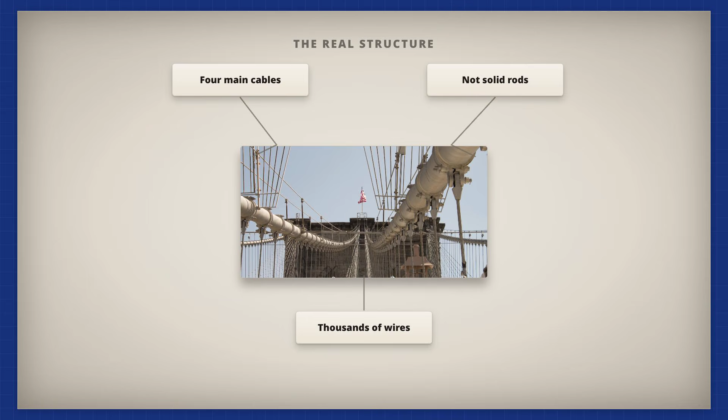Read that number again. The Brooklyn Bridge does not have 4 cables of equal weight that look like solid steel rods. The Brooklyn Bridge has 4 main cables, each one approximately 15.75 inches in diameter, each one composed of 5,434 individual parallel galvanized steel wires bundled into 19 strands, then wrapped into the final main cable.

Multiply 5,434 wires by 4 main cables by the bridge's main span of 1,595 feet, plus the side spans and the anchorage runs, and you arrive at approximately 14,000 miles of total wire length.

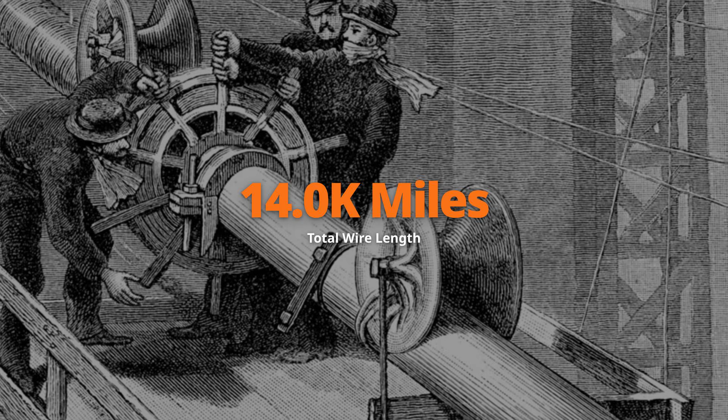Every single inch of that wire was spun in place over the East River in 1877 and 1878, using traveler wheels on overhead rails to carry each individual wire across the gap continuously, one strand at a time, day after day, for 26 months of continuous spinning operations.

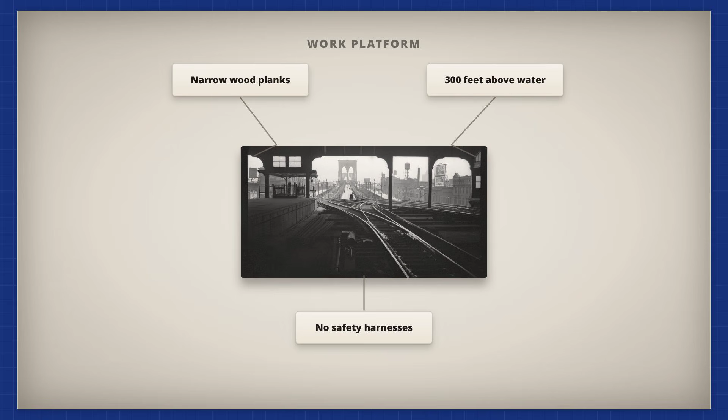The Brooklyn Bridge cable spinning operation is one of the most extraordinary engineering achievements of the 19th century. It is also one of the most physically dangerous. Workers stood on narrow wooden platforms suspended approximately 300 feet above the East River. They had no safety harnesses. They had no hard hats. They had no electric lighting.

They had heavy galvanized steel wire running through their hands at speeds determined by the traveler wheels on the overhead rail system. They worked in all weather conditions short of major storms, including high winds that swung the suspended platforms substantially. 3 workers died during the cable spinning operation specifically, falling from the platforms into the East River below.

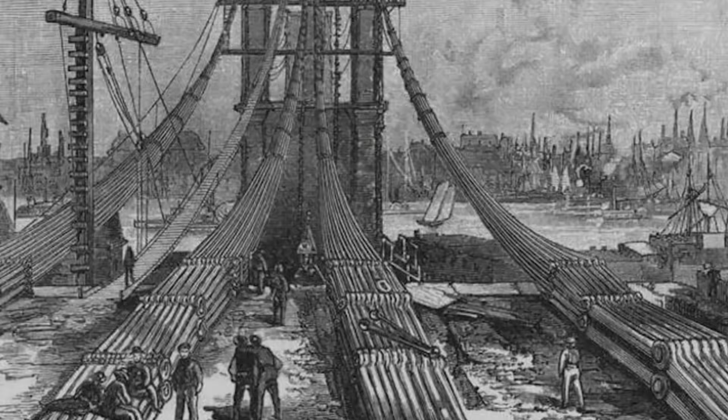24 other workers died during other phases of the bridge construction over the 14-year build period from 1869 to 1883. The total Brooklyn Bridge death count of 27 represents one of the lowest casualty rates among major American bridge projects of the late 19th century, but it was paid for in human lives nonetheless.

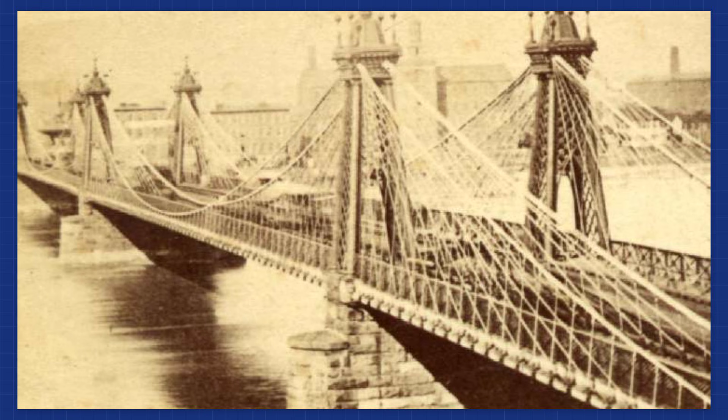The Roebling family designed and built the bridge. John Augustus Roebling was born in Germany in 1806, trained as a civil engineer in Berlin, emigrated to the United States in 1831, and built his career on iron wire rope manufacture and suspension bridge engineering. By the 1860s, Roebling was the most respected suspension bridge engineer in the United States.

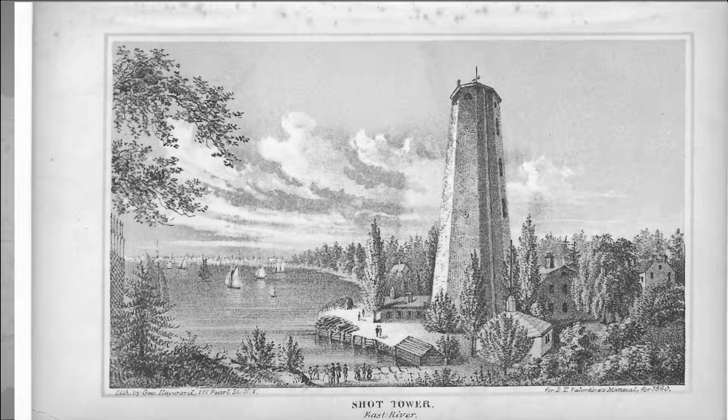He had designed and built the Allegheny Suspension Bridge in Pittsburgh, the Niagara Falls Suspension Bridge between New York and Ontario, and the Cincinnati Suspension Bridge across the Ohio River. In 1865, the New York State Legislature authorized a private corporation to build a suspension bridge across the East River between New York City and Brooklyn.

Roebling submitted the design proposal in 1867. Construction was authorized to begin in 1869. John Roebling personally surveyed the bridge site at the Brooklyn shoreline on June 28, 1869. He was standing on a dock supervising the alignment when a Fulton ferry boat collided with the dock and crushed his foot. The injury became gangrenous.

Tetanus set in. John Augustus Roebling died on July 22, 1869, 24 days after the survey accident, at the age of 63.

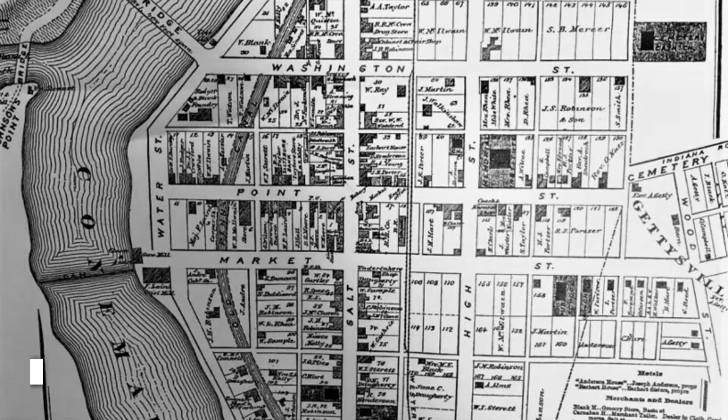Roebling had emigrated from Mühlhausen, Prussia to the United States in 1831 at the age of 25, originally settling in western Pennsylvania to establish a German immigrant agricultural community. The agricultural settlement struggled commercially, and Roebling turned to civil engineering work for various Pennsylvania canal and railroad projects through the 1830s.

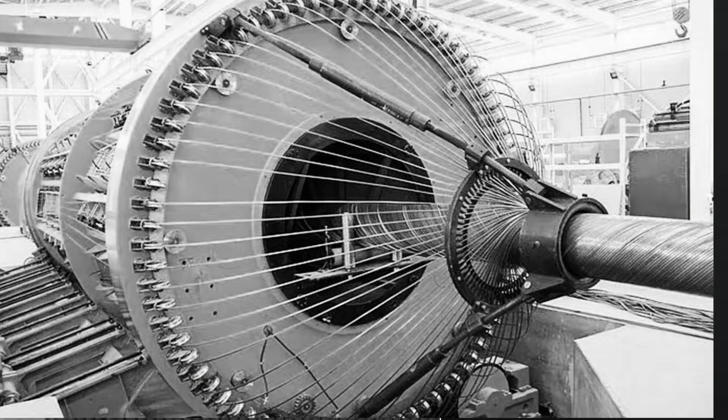By 1840, he had developed the first American iron wire rope manufacturing process, initially produced at a small wire works in Saxonburg, Pennsylvania, and later expanded to the larger Trenton, New Jersey facility. The iron wire rope was used for canal portage railroad cables, mine hoisting cables, and various other industrial applications. The wire rope manufacturing experience gave Roebling deep technical knowledge of high-strength tension cable behavior.

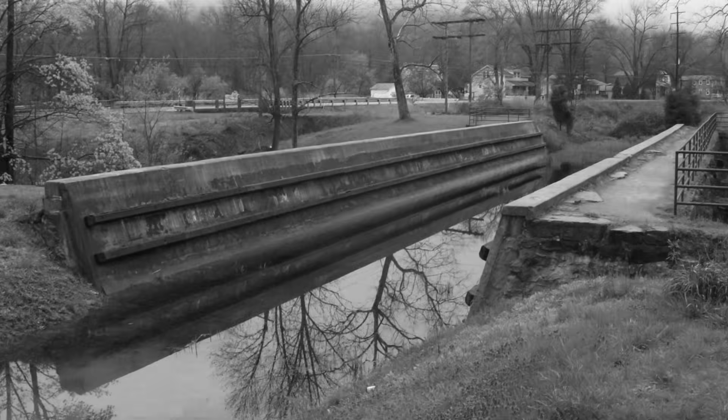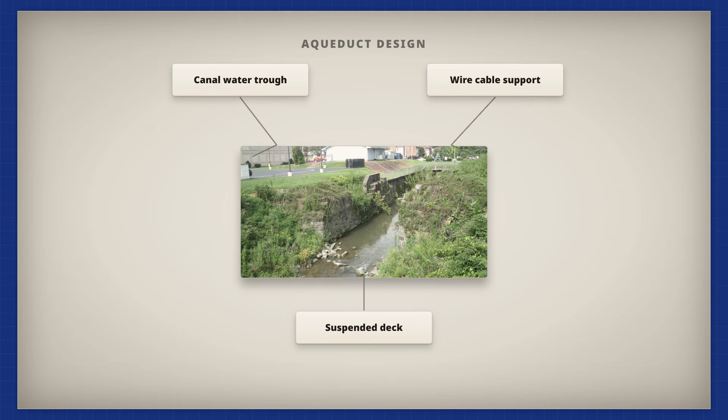which became the foundation for his subsequent suspension bridge work. Roebling's first major suspension bridge was the Allegheny Aqueduct, completed in 1845 across the Allegheny River in Pittsburgh. The aqueduct carried the Pennsylvania Canal across the river on a wire cable suspension structure, with a wooden trough carrying the canal water along the suspended deck.

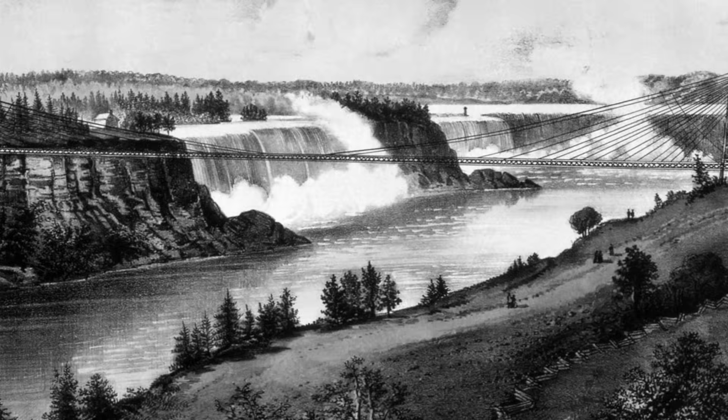The Allegheny Aqueduct was the first practical demonstration of wire cable suspension technology for major civil engineering work in the United States. The bridge operated successfully for 15 years before being replaced by a larger iron suspension bridge in the 1860s. The technical lineage from the Allegheny Aqueduct through Roebling's subsequent works to the Brooklyn Bridge is direct and continuous.

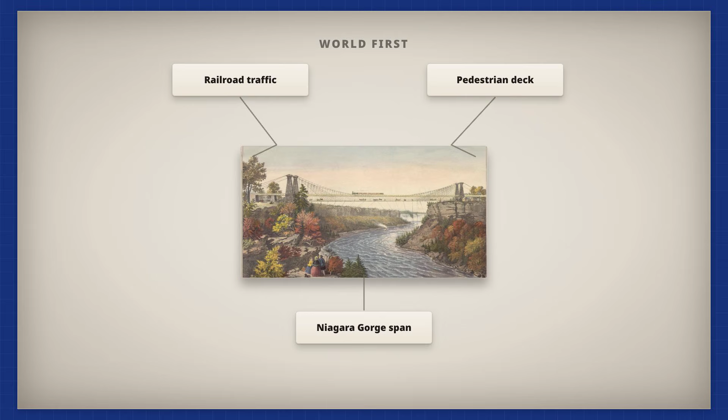Roebling's second major work was the Niagara Falls Suspension Bridge, completed in 1855. The Niagara Falls Bridge carried both railroad and pedestrian traffic across the Niagara Gorge between New York State and Ontario, Canada. The bridge was the first major railroad suspension bridge in the world, demonstrating that wire cable suspension could handle the heavy dynamic loads of railroad traffic. The Niagara Falls Bridge operated for 42 years before being replaced by a steel arch bridge in 1897.

Roebling's third major work was the Cincinnati Suspension Bridge, completed in 1866 across the Ohio River between Cincinnati, Ohio and Covington, Kentucky. The Cincinnati Bridge was the longest suspension bridge in the world at completion, with a main span of 1,057 feet. The bridge is still in active service today, having been continuously operated for 159 years.

Washington Augustus Roebling was 32 years old when his father died. He had served as a Union Army colonel during the Civil War, had spent 2 years studying European bridge construction in Berlin, Paris, and London during the 1860s, and had served as his father's chief assistant on the Cincinnati Suspension Bridge. He took over as chief engineer of the Brooklyn Bridge project within days of his father's death.

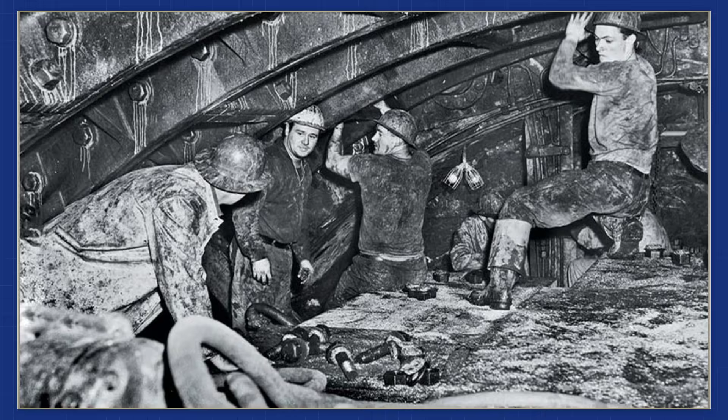The first major construction phase was the building of the 2 stone tower foundations in the East River bed. The tower foundations required pneumatic caissons. A pneumatic caisson is a large wooden box, open at the bottom, sealed at the top, that is lowered into the riverbed and filled with compressed air to keep water out. Workers descend into the caisson through an airlock shaft from the surface, then excavate the riverbed under the caisson to lower it deeper into the bedrock.

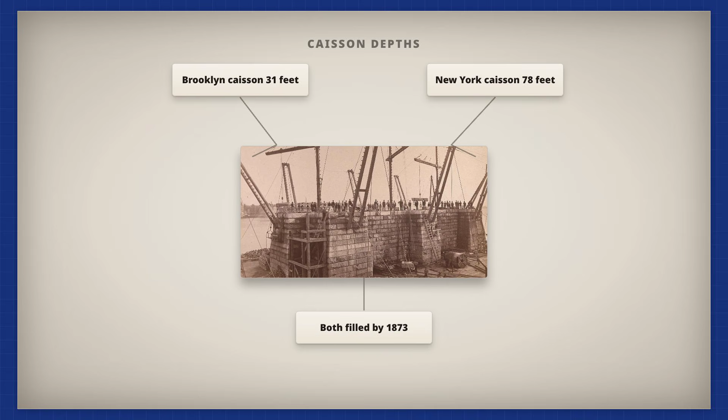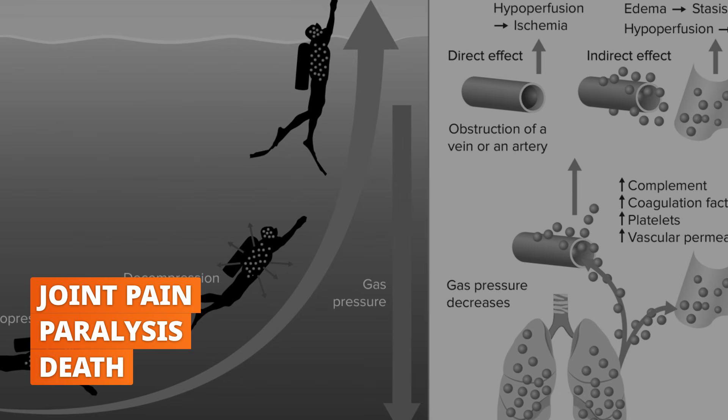The Brooklyn caisson was 31 feet below the East River water level. The New York caisson was 78 feet below. Both caissons had been sunk and filled with concrete by 1873. The problem with pneumatic caissons was a medical condition that 19th century engineers and physicians did not fully understand. When workers came back to the surface from a high-pressure caisson environment, they sometimes developed severe joint pain, paralysis, and in some cases death. The condition was called caisson disease at the time, or the bends because the joint pain made workers bend over in pain.

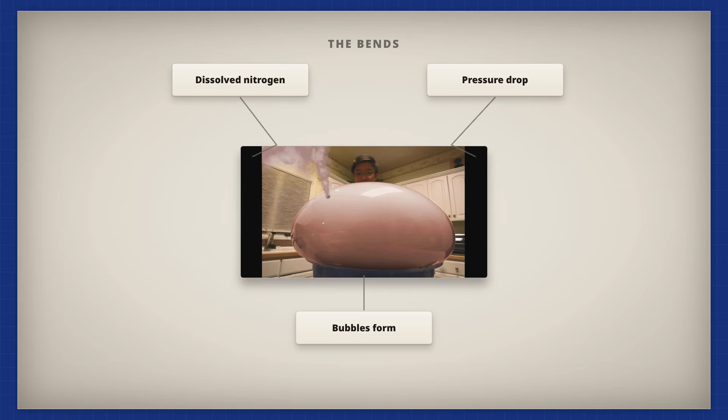Modern medicine calls it decompression sickness. It is caused by nitrogen gas dissolved in the bloodstream under high pressure forming bubbles in the blood and tissues as the pressure decreases during decompression. Nobody in 1872 understood the gas bubble mechanism. The treatment at the time was rest and warmth, neither of which actually helped. The only effective prevention was slow gradual decompression, which the Brooklyn Bridge crews started using on an ad hoc basis after some workers seemed to recover better than others.

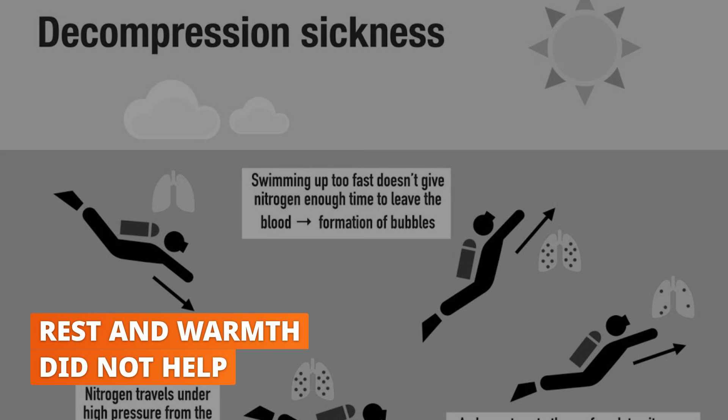Washington Roebling personally supervised the caisson work in 1872 and 1873, descending into the New York caisson at 78 feet of water depth multiple times per week to inspect the excavation progress. In late 1872, after one particularly long inspection in the New York caisson, Washington came up to the surface and collapsed. He had severe joint pain, partial paralysis, and what his wife later described as nervous prostration.

He never fully recovered. From 1873 onward, Washington Roebling was a partial invalid, confined mostly to his home in Brooklyn Heights, unable to walk to the bridge site, unable to climb on the construction platforms, unable to physically inspect the work. He was the chief engineer of the largest bridge construction project in American history, and he could not get out of his upper floor bedroom for the next 11 years.

Emily Warren Roebling was 29 years old when her husband Washington was disabled by caisson disease. She had been born into a prominent New York family in Cold Spring on the Hudson, had received an unusually thorough education for a woman of her generation, and had been corresponding with her husband on engineering matters since their marriage in 1865. When Washington was confined to bed, Emily became his deputy at the bridge construction site.

She visited the bridge daily for the next 11 years. She carried Washington's written instructions to the foreman. She studied Washington's engineering specifications. She gradually learned the technical content of the project so thoroughly that she could answer engineering questions from the foreman and the public on her own authority. By 1875, Emily Warren Roebling was effectively running the bridge construction project on behalf of her husband.

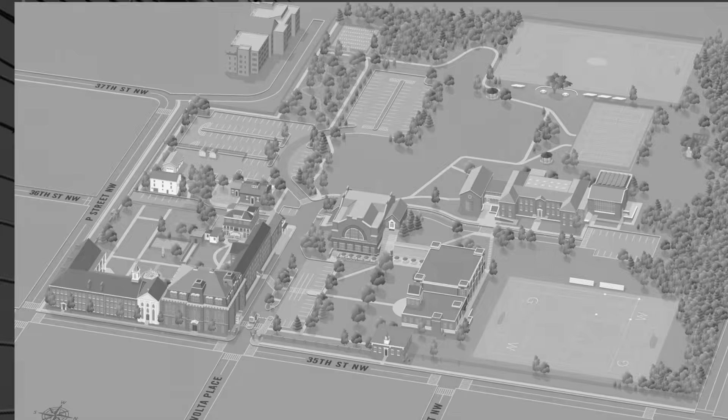Now we walk through the cable spinning operation specifically and why it is the technical heart of the Brooklyn Bridge story. Emily Warren Roebling's specific engineering education during her years as her husband's deputy deserves more detailed attention because it represents one of the most remarkable self-taught engineering education stories in American history. Emily had received an unusually thorough education for a woman of her generation at the Georgetown Visitation Convent School, where she had studied mathematics, French, and classical literature through age 18.

When her husband was disabled in 1873, Emily began systematic study of engineering with materials that Washington selected and explained to her from his bedroom. The curriculum included Henry Moseley's The Mechanical Principles of Engineering and Architecture, William Rankine's Manual of Civil Engineering, and various technical reference books on suspension bridge engineering, material science, and construction management. Emily studied these texts in the evenings while spending her days at the bridge construction site. Within 3 years, Emily had developed engineering knowledge sufficient to answer technical questions from foremen, contractors, and visiting engineers on her own authority without consulting Washington.

The engineering correspondence Emily maintained with the bridge contractors, the New York City municipal engineers, and the broader engineering community during her years as effective chief engineer is preserved at the Rensselaer Polytechnic Institute archives in Troy, New York. The letters show Emily addressing detailed technical questions including cable tension calculations, anchorage stress analysis, deck truss design questions, and labor management issues. The correspondence is signed by Emily directly, not as her husband's representative. Engineering visitors to the bridge construction site routinely addressed her as the responsible engineer on the project.

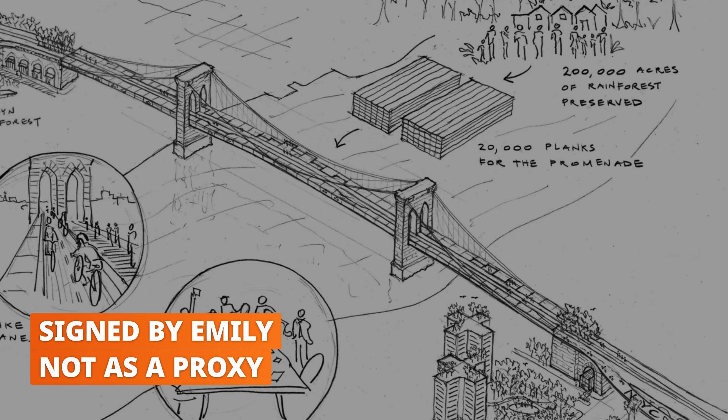The American Society of Civil Engineers, founded in 1852, did not admit women as members during Emily's lifetime. But Emily was invited to speak at the Society's annual meeting in 1882 specifically about her work on the Brooklyn Bridge. She declined the invitation, but the offer itself was unprecedented for a woman in 19th century American engineering.

The opening ceremony speech delivered by Abram Hewitt on May 24, 1883, included an extended public tribute to Emily Warren Roebling specifically. Hewitt was the New York congressman who had championed the Brooklyn Bridge project through Congress during the 1870s and who served as the official ceremonial speaker at the opening. Hewitt's speech included the lines, "The name of Mrs. Washington A. Roebling will be inseparably associated with all that is admirable in human nature and with all that is wonderful in the constructive world of art."

The tribute was published in newspapers across the United States the following day. It was the first time in American history that a major engineering achievement was publicly credited to a woman engineer at the opening ceremony of the project.

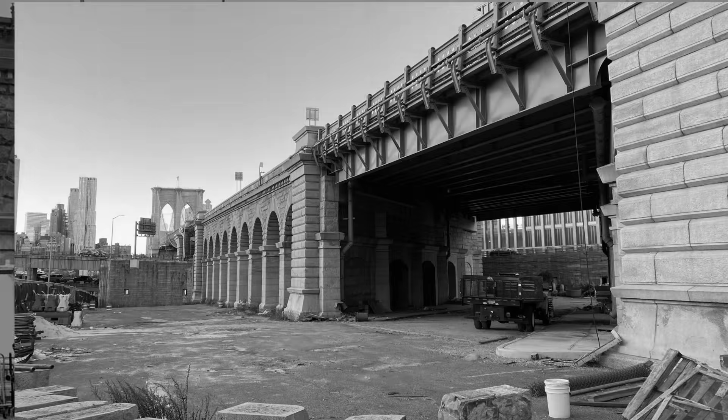The cable spinning operation began in earnest in May 1877. The 2 stone towers had been completed. The cable anchorages had been built on the Brooklyn and Manhattan shorelines. The anchorages were massive concrete and stone structures that held the ends of the cables firmly against the loading of the bridge deck. Each anchorage contained approximately 20,000 tons of stone and concrete fill, with iron eye-bars embedded in the masonry to attach to the cable strand ends.

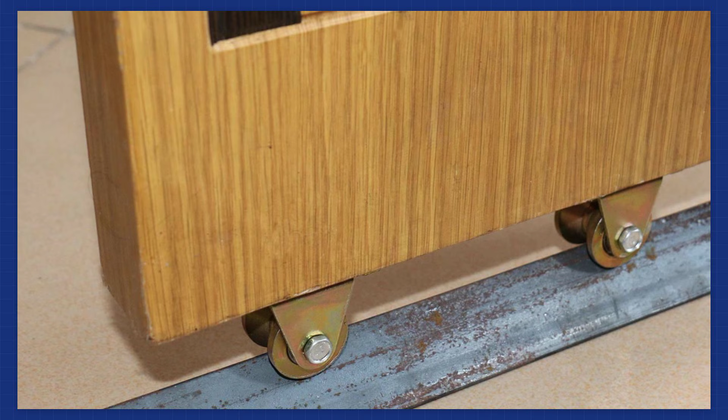The cables themselves had to be spun from individual galvanized steel wires across the East River and through the anchorages at both ends. The traveler wheel was the key piece of equipment for the spinning operation. A traveler wheel is a large wooden grooved wheel, approximately 8 feet in diameter, that rides on an overhead cable rail strung across the bridge from anchorage to anchorage over the tower tops.

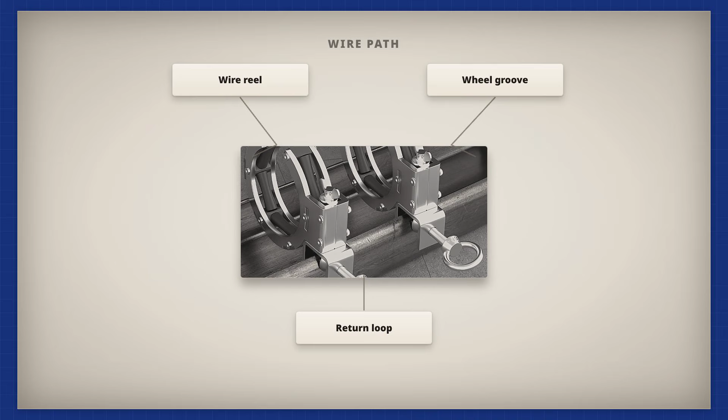The traveler wheel carries a single steel wire in its groove, with the wire fed continuously from a reel at one anchorage, around the traveler wheel, across the river, around a return wheel at the opposite anchorage, and back to the original anchorage. The traveler wheel is driven by a steam engine on the anchorage end, pulling the wire across the river at controlled speeds.

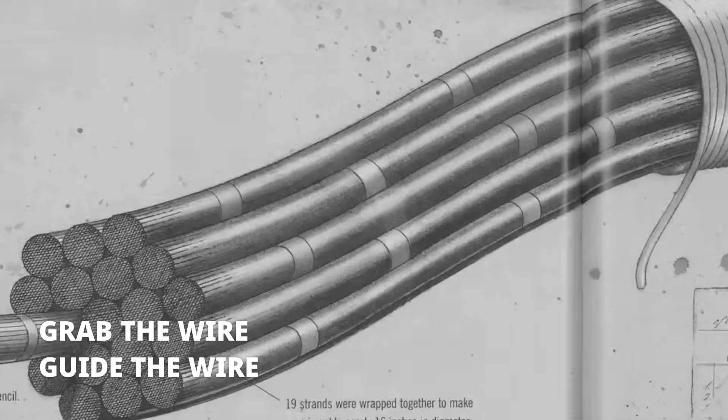Workers on the bridge platforms grab the wire as it passes and guide it into the proper position in the developing cable bundle. As each wire reaches its position, the wire is clamped temporarily in place, and the traveler wheel begins another circuit with the next wire. Repeat this process 5,434 times for each of the 4 main cables. 6 months of continuous operation.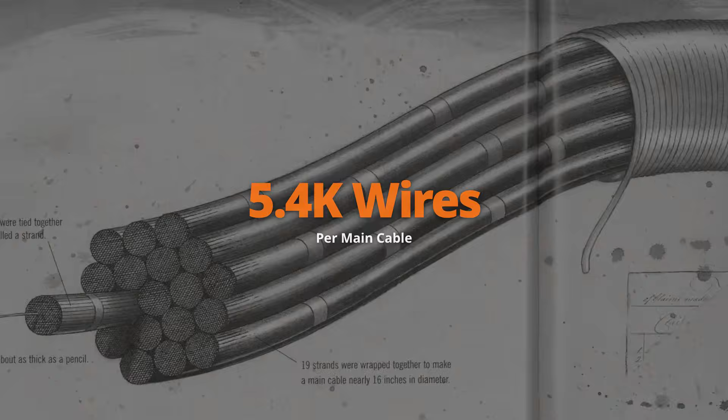Workers on the platforms handling wires, clamping them in position, bundling them into the developing strands, all while balanced on narrow wooden walkways 300 feet above the river.

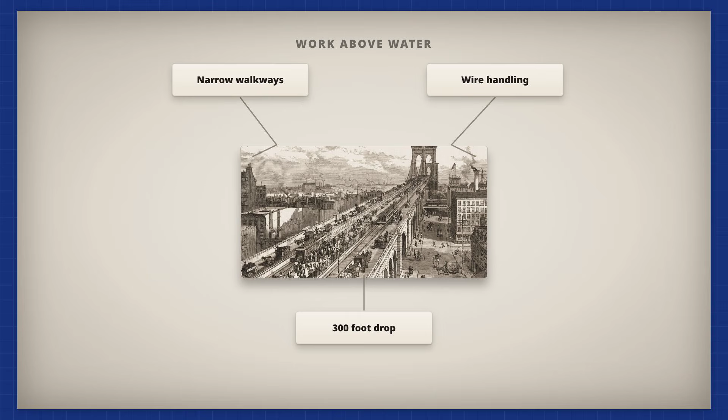The Roebling family wire works in Trenton, New Jersey, supplied the galvanized steel wire for the bridge cables. John Roebling had founded the wire works in 1848, originally to manufacture the iron wire rope he used for his early suspension bridges. By the 1870s, under the management of John's other son, Charles Roebling, the Trenton Works was producing high-strength galvanized steel wire to specifications that John Augustus Roebling had developed personally over the previous 20 years.

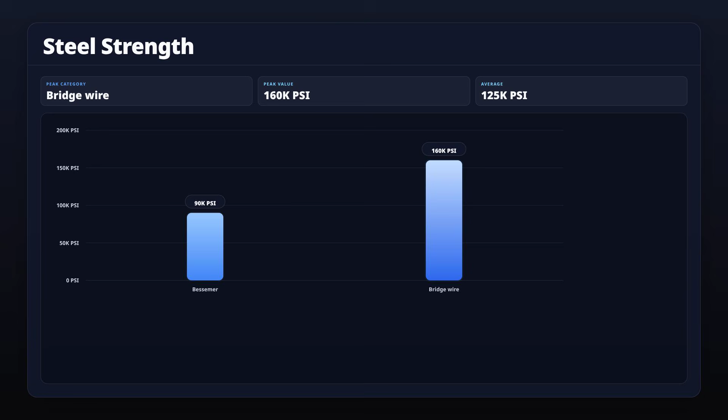The wire was approximately 1/8 of an inch in diameter, galvanized to resist corrosion, and tested to a tensile strength of 160,000 pounds per square inch. That tensile strength was approximately 3 times higher than the wrought iron strength used in earlier suspension bridges of the period. The Brooklyn Bridge cable specification could not have been built using wrought iron at the planned bridge span and load. The Roebling family had spent 20 years developing the steel wire technology specifically for this project.

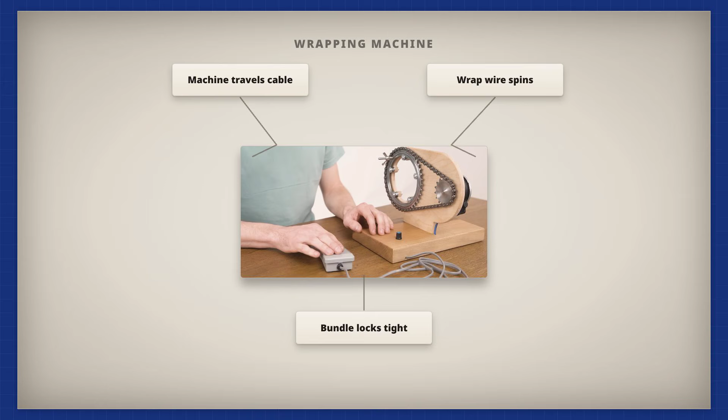The bundling process for the cables involved compressing the 19 strands of each cable into a tight cylindrical bundle, then wrapping the bundle with smaller diameter spiral wire that held the bundle together permanently. The wrapping wire was applied by a specialized machine called a cable wrapper, which traveled along the bundle as it ran across the bridge, spinning a continuous loop of wrapping wire tightly around the bundle. After wrapping, the cable was coated with red lead paint to protect against corrosion.

The total mass of each completed main cable was approximately 780 tons. The 4 main cables together added up to over 3,000 tons of suspended steel. The towers had to be designed to hold that mass, plus the bridge deck, plus the live load of vehicle and pedestrian traffic.

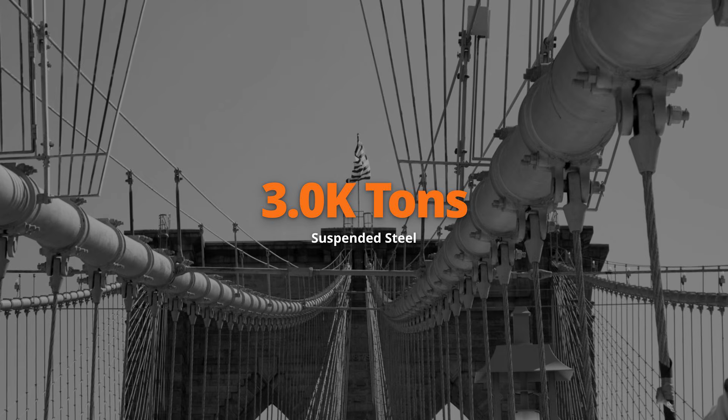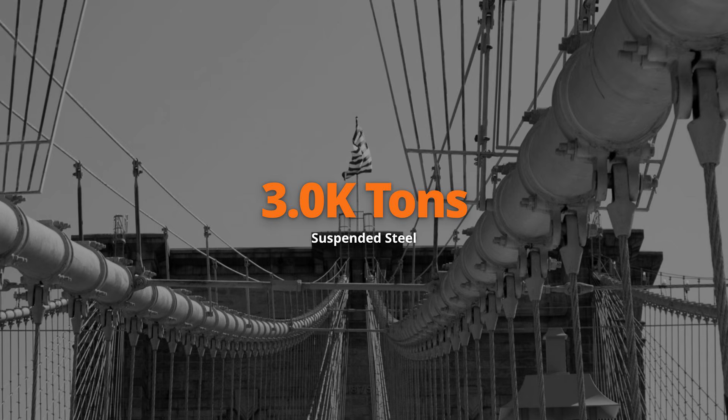The Roebling Trenton Wire Works manufacturing process for the galvanized steel wire deserves separate technical description because the wire specification was the key engineering enabler for the entire bridge. The Trenton Works under Charles Roebling, John's son and the brother of Washington, produced approximately 14,000 miles of galvanized steel wire for the Brooklyn Bridge between approximately 1876 and 1878.

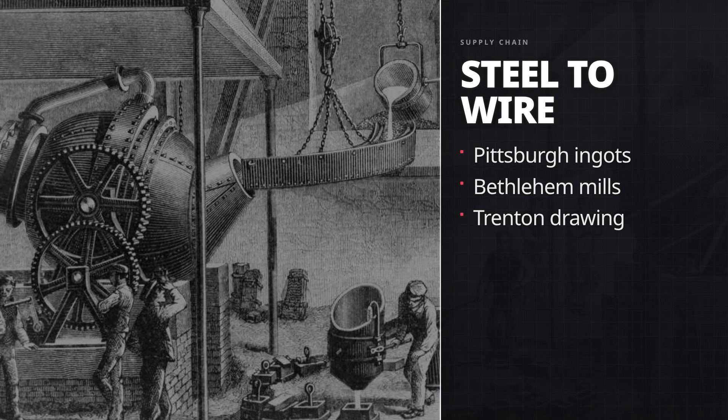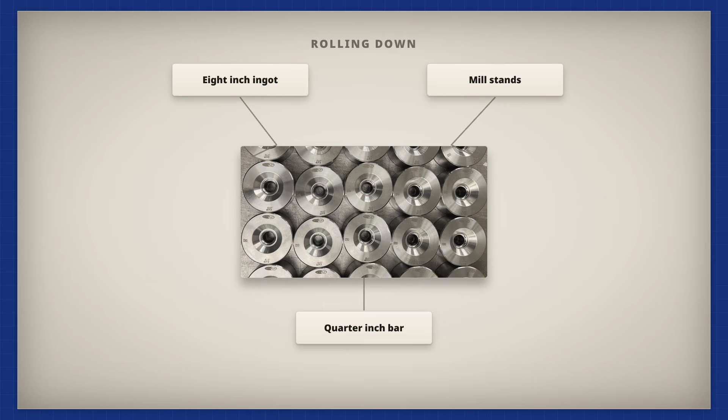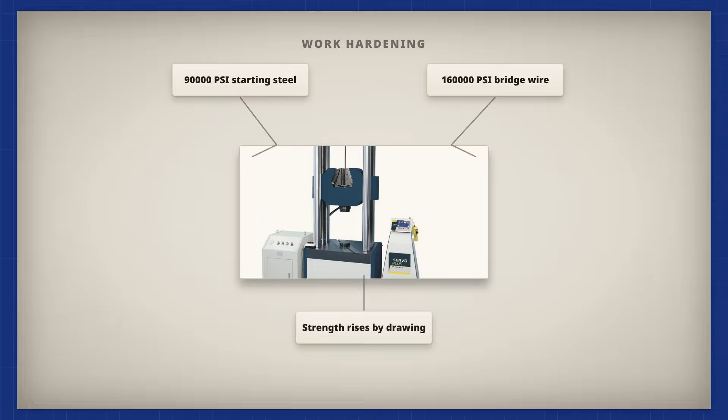The drawing process work-hardened the steel substantially, increasing the tensile strength from the approximately 90,000 pounds per square inch of the original Bessemer steel to the approximately 160,000 pounds per square inch of the finished bridge wire. The work-hardened wire was then galvanized through a hot-dip zinc process to provide corrosion resistance. The galvanized wire was wound onto steel reels in lengths of approximately 1 mile per reel, then shipped from Trenton to the bridge construction site by rail and barge.

Each individual reel contained approximately 1 mile of wire and weighed approximately 1,000 pounds. The total wire requirement of 14,000 miles meant approximately 14,000 reels of wire had to be shipped from Trenton to Brooklyn over the spinning operation period.

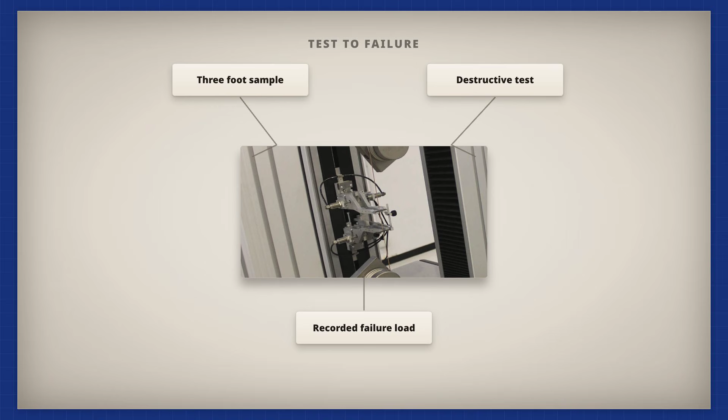The quality control process at the Trenton Works was extraordinary by 19th century standards. Each batch of wire was tested for tensile strength using a destructive sample of approximately 3 feet from each 1 mile reel. The tested sample was loaded in a calibrated tension testing machine until failure, with the breaking load recorded against the specified minimum. Any batch falling below the specified tensile strength was rejected and not shipped to the bridge site. Approximately 3% of the wire batches produced during the bridge construction period were rejected for failing tensile testing. The rejected wire was reprocessed or sold as lower-grade industrial wire to other customers.

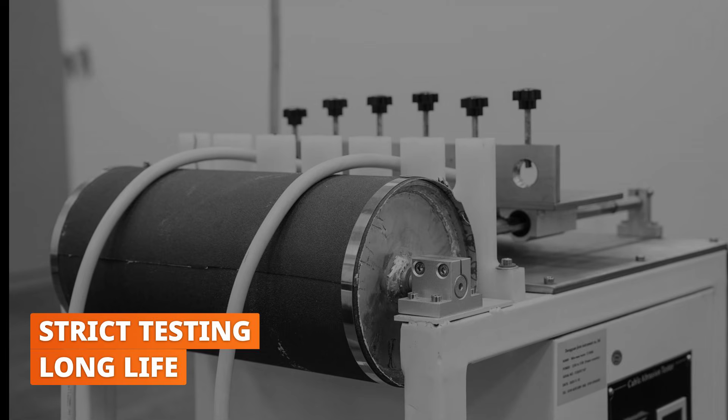The quality control system was the reason the bridge cables have lasted so long. The Trenton wire that made it to the Brooklyn Bridge cables had passed quality testing far stricter than any subsequent American bridge wire specification.

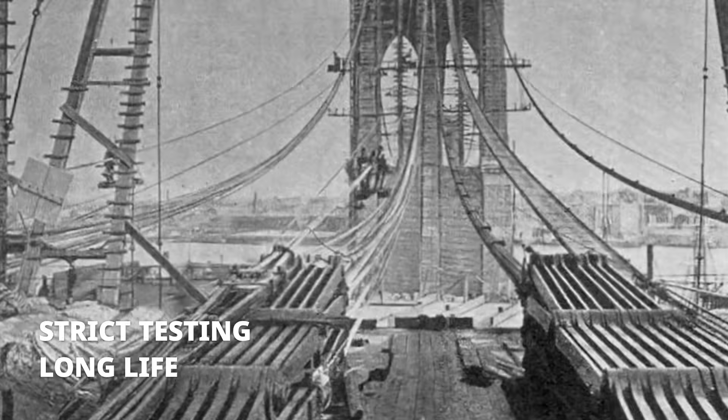The deck construction phase followed the cable spinning. The deck was a steel truss carrying the road, rail, and pedestrian surfaces. The deck steel was manufactured at multiple foundries across the eastern United States, including the Edgemoor Iron Works of Wilmington, Delaware, the Phoenix Iron Company of Phoenixville, Pennsylvania, and the Bethlehem Iron Works of Bethlehem, Pennsylvania.

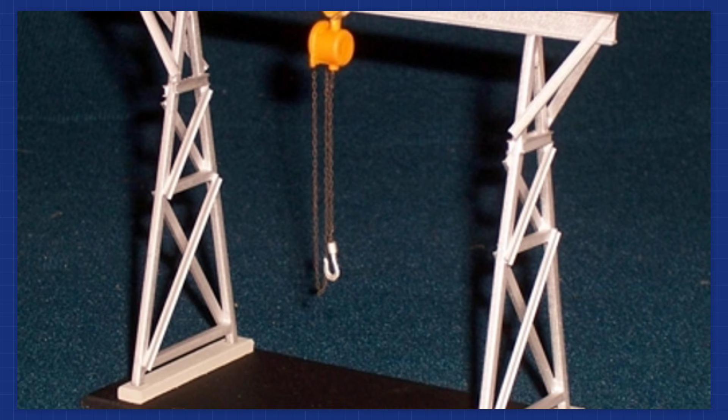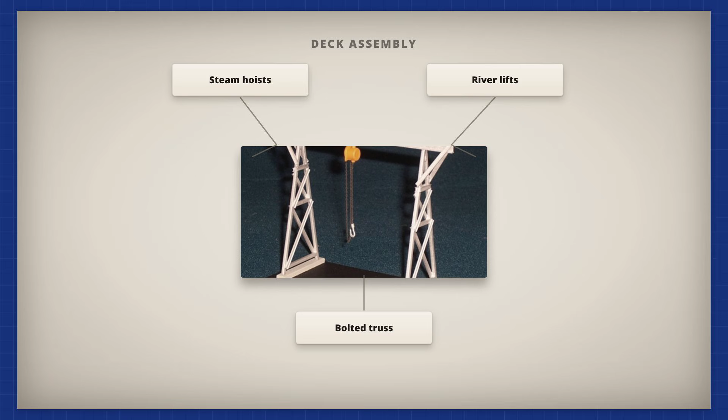The deck assembly proceeded from the towers outward, with deck sections hoisted from the river by steam hoists and bolted into the developing truss. The deck assembly took approximately 4 years, from 1878 to 1882. Final assembly of the entire bridge structure was complete by April 1883. The opening ceremony was scheduled for May 24, 1883.

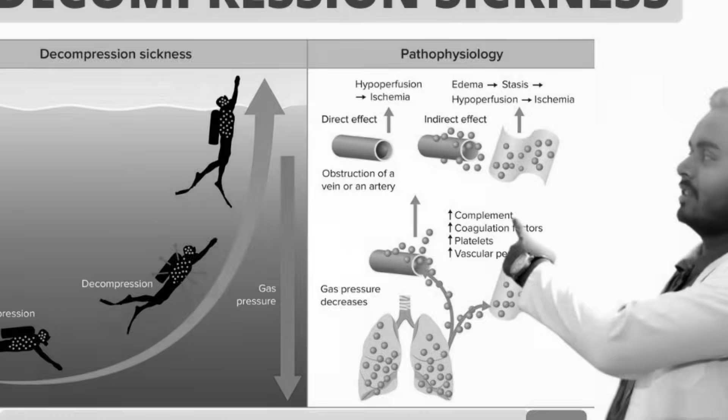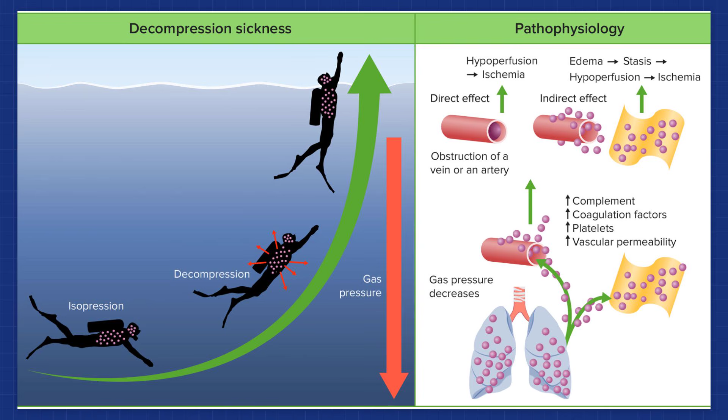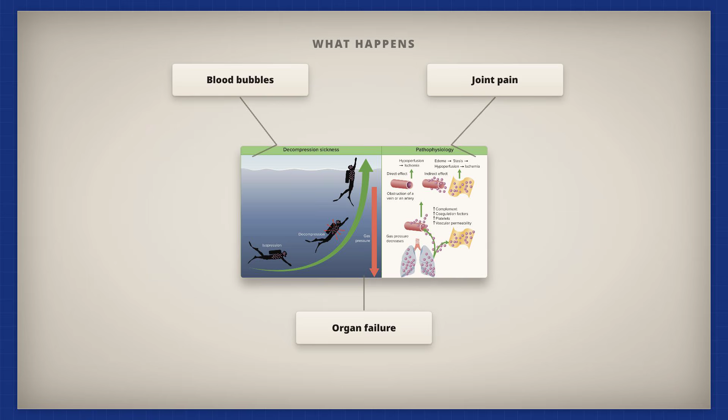The pneumatic caisson disease that crippled Washington Roebling deserves more detailed medical and engineering description because it shaped the entire second half of the Brooklyn Bridge construction. Caisson disease, now called decompression sickness, occurs when a person is exposed to high atmospheric pressure for extended periods and then returns to normal atmospheric pressure too rapidly. The nitrogen gas dissolved in the blood and tissues under high pressure forms bubbles as the pressure decreases, causing severe joint pain, paralysis, and in serious cases, organ failure or death.

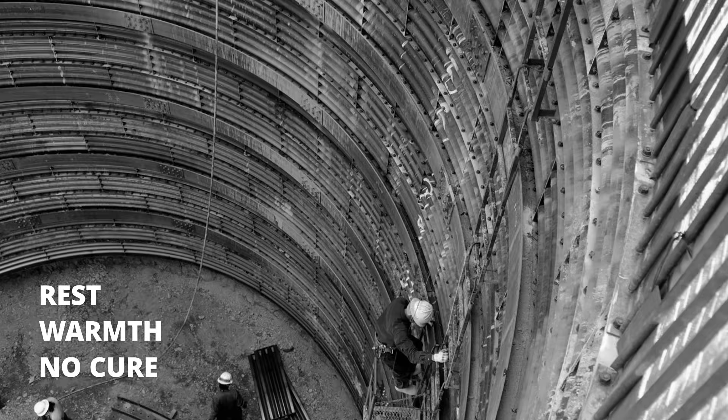The condition was not understood medically in 1872 when Washington Roebling developed it. The treatment available at the time was rest, warmth, and various unhelpful 19th century medicines. None of the standard treatments were effective. The only effective intervention was slow gradual decompression during the return to the surface, which the Brooklyn Bridge crews began using on an ad hoc basis, after observing that some workers seemed to recover better than others.

Washington Roebling's specific case was particularly severe because he descended into the New York caisson at 78 feet of water depth multiple times per week over an 18-month period in 1872 and 1873. The cumulative nitrogen exposure damaged his nervous system extensively. Modern medical analysis of his symptoms, based on the detailed correspondence he maintained throughout his life, suggests that he probably suffered permanent spinal cord damage from chronic decompression sickness, with additional symptoms of post-traumatic stress and chronic pain syndrome that compounded the physical disability. He never fully recovered.

From 1873 until his death in 1926, Washington Roebling was a partial invalid, unable to perform sustained physical activity, requiring substantial daily medical care, and dependent on his wife Emily for the routine activities of daily life.

The other Brooklyn Bridge caisson disease casualties beyond Washington Roebling included approximately 120 workers who developed clinical symptoms of caisson disease during construction. Of those, approximately 3 died directly from the immediate symptoms, primarily from cardiovascular collapse or stroke during severe decompression incidents. The remaining 117 survived, but with varying degrees of permanent disability. The total caisson disease casualty rate among the bridge construction workforce who worked the high-pressure caissons was approximately 20%, an extraordinarily high industrial disease rate.

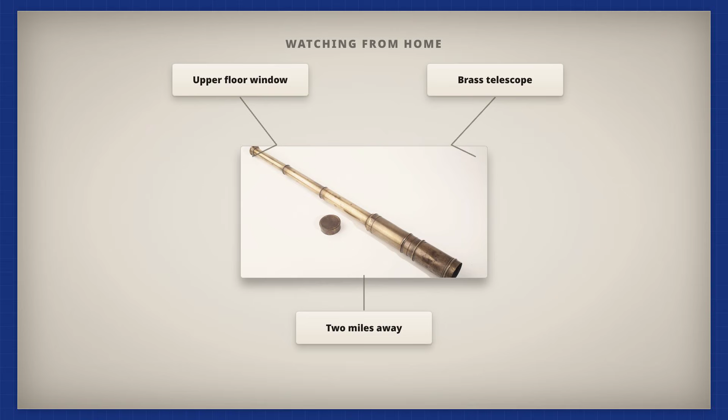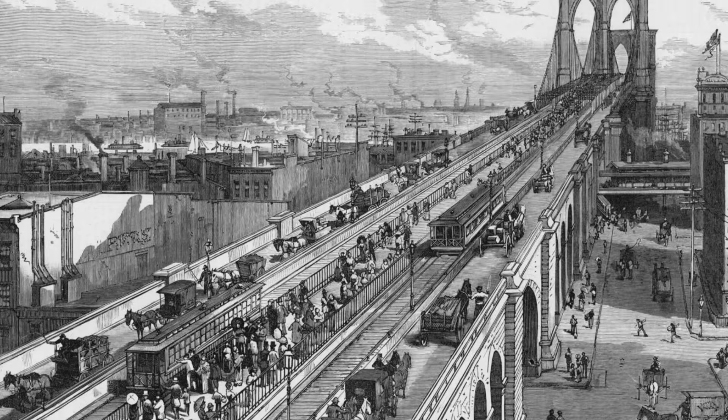The Brooklyn Bridge opened for full traffic the day after the ceremony. Initial traffic included pedestrians, carriages, horse-drawn streetcars, and the first cable car runs across the bridge deck. Total daily traffic in the first year of operation was approximately 300,000 crossings, including the cable car passengers, the pedestrians, and the carriage traffic. By the early 1900s, after the introduction of automobile and elevated rail traffic, daily crossings reached approximately 700,000. The current daily traffic count is approximately 105,000 vehicles, plus approximately 30,000 pedestrians and bicyclists.

Anyone who has seen the masonry on a 150-year-old bridge knows this. The Brooklyn Bridge engineering was not just engineering. It was a particular generational achievement that combined 3 decades of Roebling family suspension bridge experience.

14 years of Brooklyn Bridge construction labor, the engineering management work of Washington and Emily Roebling, and the steel wire technology developed at the Trenton Family Wire Works. The bridge could not have been built without all of those components coming together at exactly the right time.

John Roebling died before construction began. Washington Roebling could not physically supervise the construction after 1873. Emily Roebling carried the project across the finish line through 11 years of effective de facto chief engineer responsibility. The cables they built together are still holding the bridge up today.

The opening day procession across the bridge on May 24, 1883, was a particular spectacle that deserves separate description. The procession was led by Emily Warren Roebling in a carriage drawn by white horses, accompanied by Governor Grover Cleveland and President Chester Arthur. The procession crossed from the Brooklyn approach to the Manhattan approach over the course of approximately 45 minutes, with the carriage moving slowly to allow the assembled crowds on both sides to view the participants.

The carriage carried a live rooster that Emily had brought as a symbolic gesture, allegedly to ensure that the bridge would never become the property of New York City politicians. The rooster gesture was widely reported in the newspapers of the day and became part of the bridge opening folklore. The choice of Emily as procession leader was deliberate. Washington Roebling had specifically requested that his wife be honored as the de facto chief engineer of the project, and the Brooklyn Bridge Corporation Board had agreed.

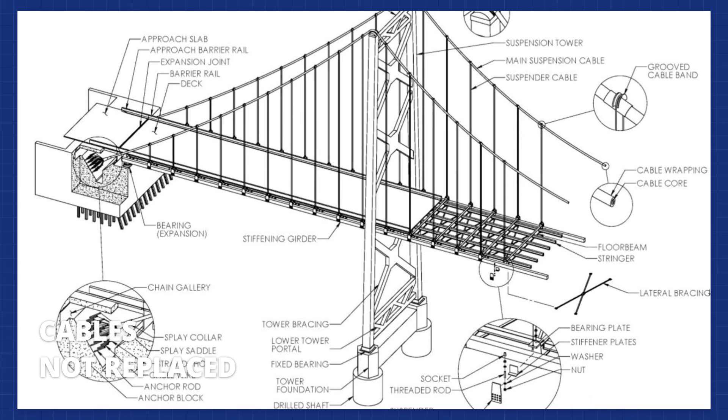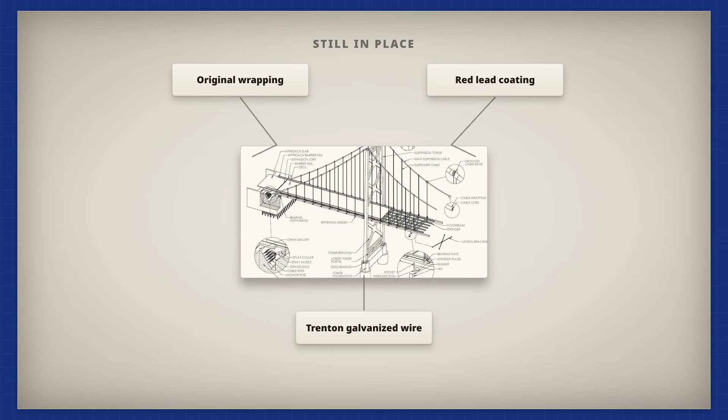The Brooklyn Bridge has been continuously in service since its opening on May 24, 1883. The cables have not been replaced. The main steel cables of 1877 and 1878, the original Roebling galvanized wire from Trenton, New Jersey, the original wrapping and red lead coating, are still in place today. The cables have been periodically inspected by stress testing and X-ray equipment. The annual New York City Department of Transportation inspection reports document that approximately 5% of the original wire strands have developed corrosion damage over the past century and a half, but the overall cable strength remains within engineering tolerances.

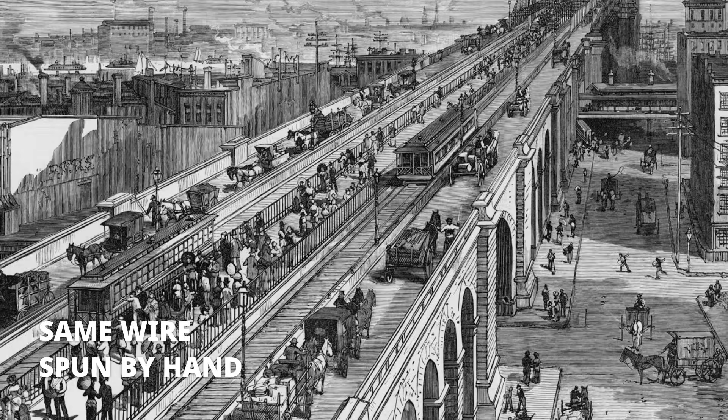The bridge deck has been substantially rebuilt several times. The most recent major reconstruction was completed in 2021. But the cables, the load-bearing heart of the bridge, are the same wire that was spun into place during 1877 and 1878, more than 140 years ago.

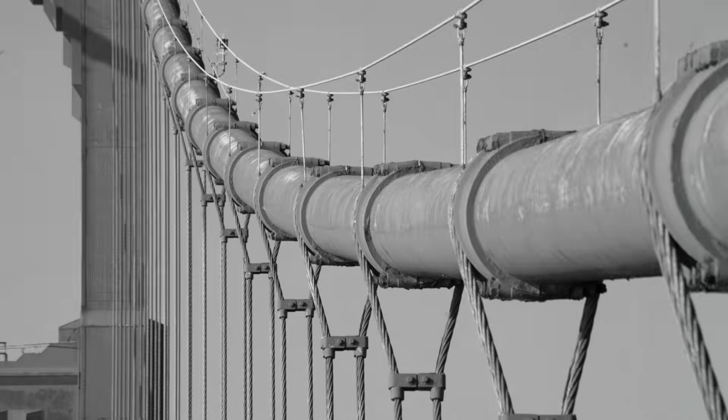The cable specification has never been matched by any modern suspension bridge cable manufactured to the same diameter and load tolerance. John Augustus Roebling's original design from 1867 has carried more total traffic than any other suspension bridge in American history. The bridge is the technical ancestor of every major American suspension bridge built since, including the Williamsburg Bridge of 1903, the Manhattan Bridge of 1909, the George Washington Bridge of 1931, the Golden Gate Bridge of 1937, the Verrazano Narrows Bridge of 1964, and the Mackinac Bridge of 1957. The Brooklyn Bridge fathered them all. The cables are still in the granite anchorages, still in the towers, still over the river. The records prove it. The wire holds.